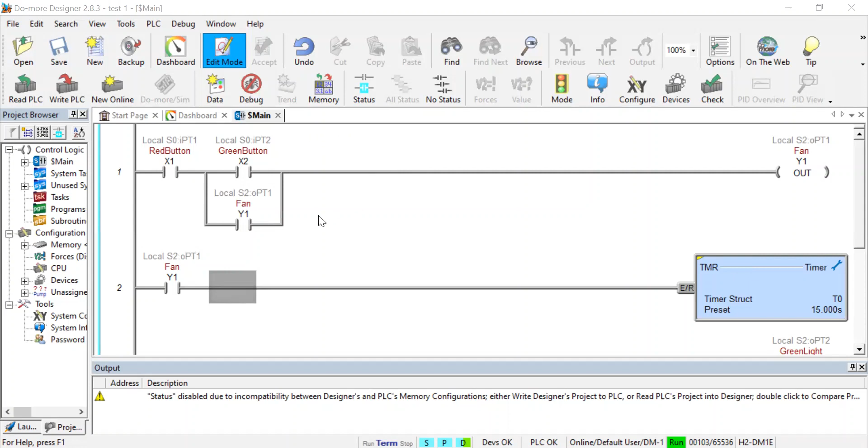And here, this is my ladder diagram I just built. So here's the first rung. We have the red button, which is X1, and the green button, X2.

So here's the fan. This fan address is the output of the PLC, and here it's the same address for the fan. We can see clearly this first rung is the so-called start, stop, and seal-in circuit, because the fan output and this input have the same address, Y1. So usually this is the red button.

This red button is the emergency stop button, as we usually see. And the green button is the start button.

If we press the green button, the current can flow from the left leg to the right and go through here. If we click this button, the current flow can go through this green button and then reach this output. As a result, the output will be energized.

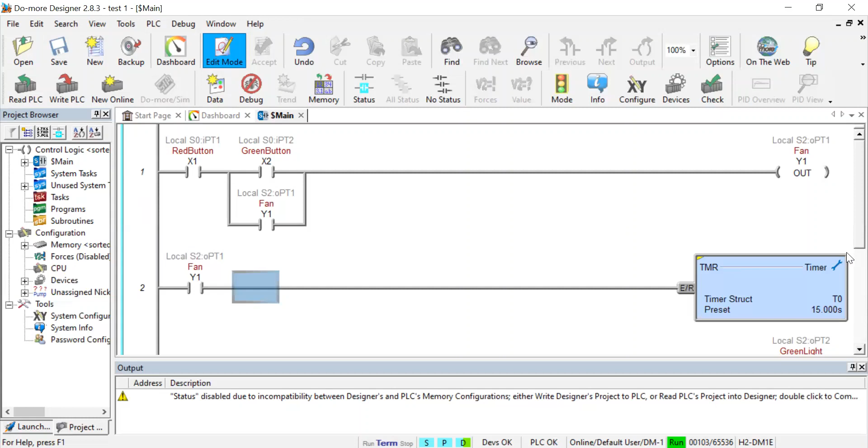So the next rung is the fan. If the fan is turned on, the timer will be triggered. So this is a timer, T0, and you can just specify the name and the preset value. For here, I specified 15 seconds.

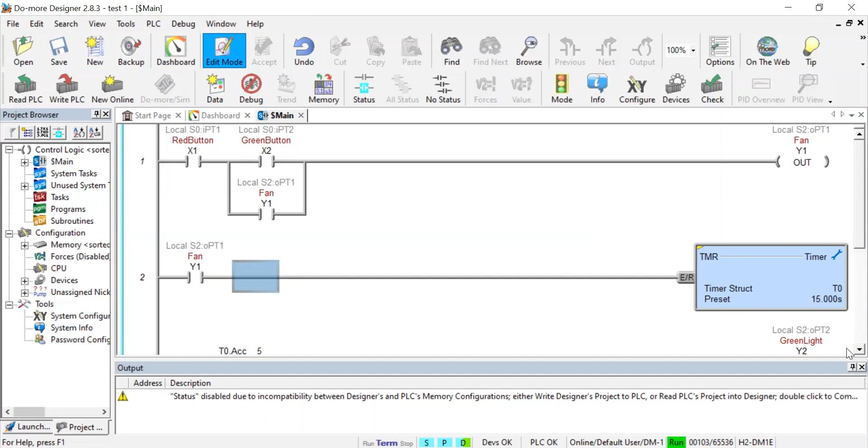I'm going to go through this whole ladder diagram, then I'm going to show you how to edit each of these input and output instructions. So here is T0. If the T0 accumulation value is greater than 5, the green light will be turned on, right? Because the timer starts from 0, so after 5 seconds the green light will be turned on.

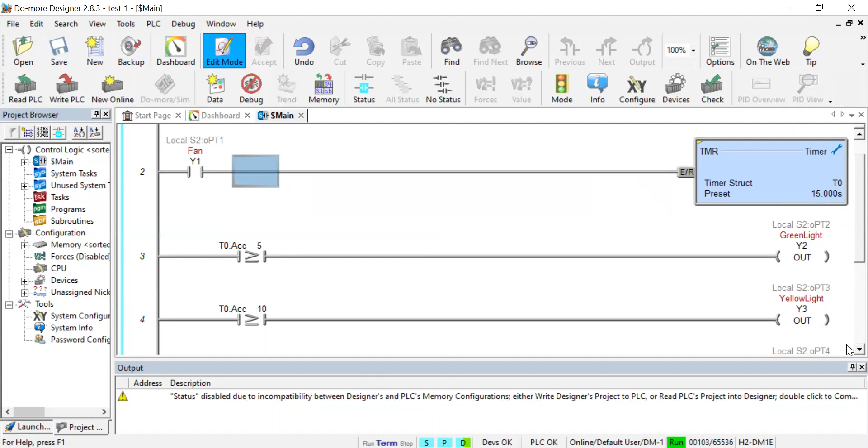So next one is T0.ACC, also the timer's accumulation value. If this value is greater than 10, the yellow light is turned on. Finally, if this is T0, the done bit is turned on. That means if the timer times out, the red light will be turned on.

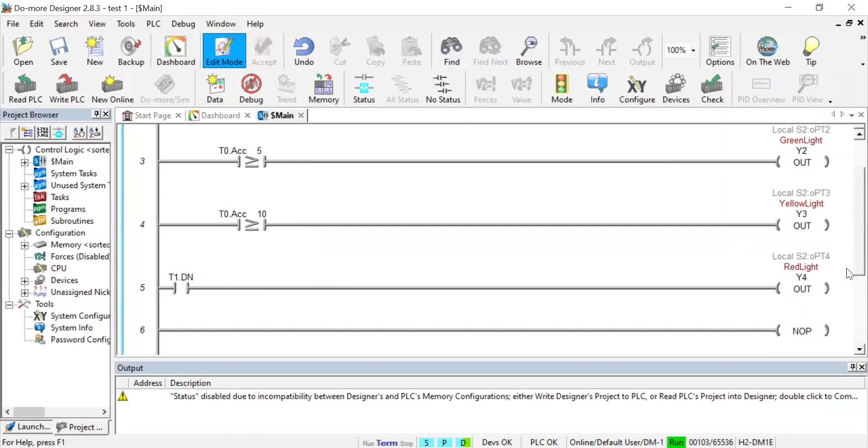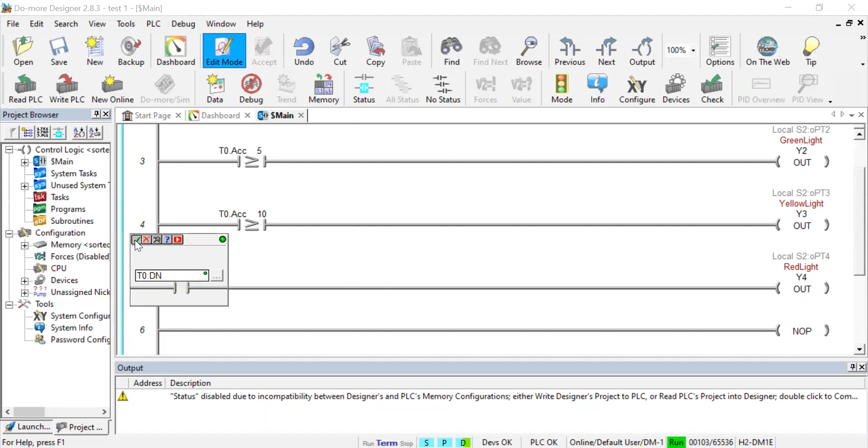So I'm going to show you how to change this. Actually it should be T0, not T1. You can see very clearly, this is Do More, and you can just change the value by typing it in. After you change it, you can click this to confirm, or click the cross to cancel what you've changed.

After you change anything, a yellow vertical bar will appear, which shows that this rung has been changed, and then you can accept it here. After you accept it, it becomes green.

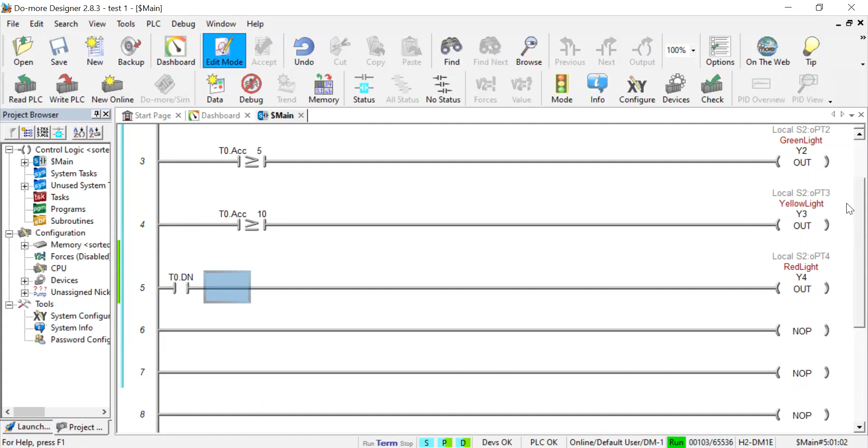So now this is the first ladder diagram using the Do-more Designer to build the ladder diagram for the Do-more PLC. So I'm going to show you here — if you want to edit anything, or build a new ladder diagram, you reach the edit mode. Once you click edit mode, the instruction toolbox will appear here.

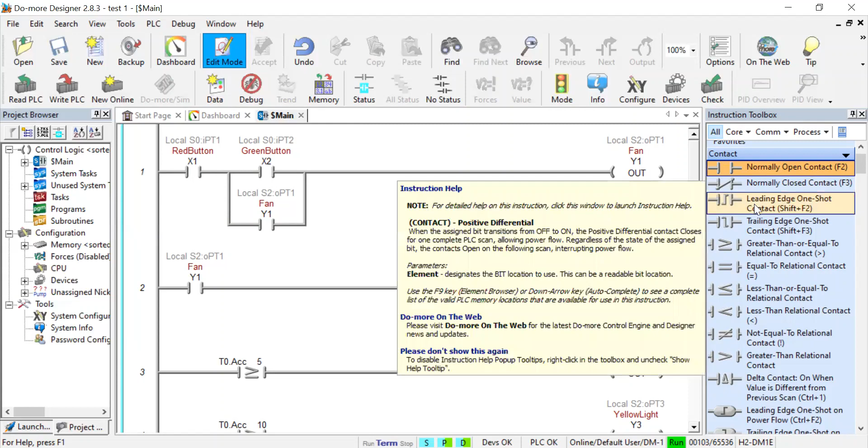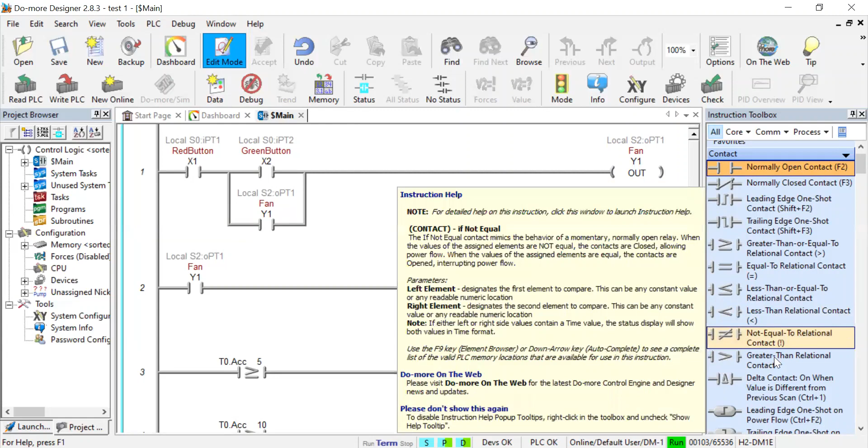So contact — this is contact here. This is normally open, normally closed, leading edge one shot. So greater, equal to, less than, relational contact, not equal to. You can see a lot of other commonly used ones. This is the contact.

So this is a contact, and then look at the coil bit IO. The coil is output, this is for output. They have end coil, the flasher, this is immediate discrete input, and output coil — we use this one, output coil out immediate bit. This is for bit address; it must be specified.

Reset I coil, set, and this is reset, reset bit. So this is the coil, and this is analog, this is device process also here. So this is a CTRIO. Let me show you the timer, because we use the timer and the counter a lot.

Hardware device, high speed math. You can do the math here also. Miscellaneous and data manipulation.

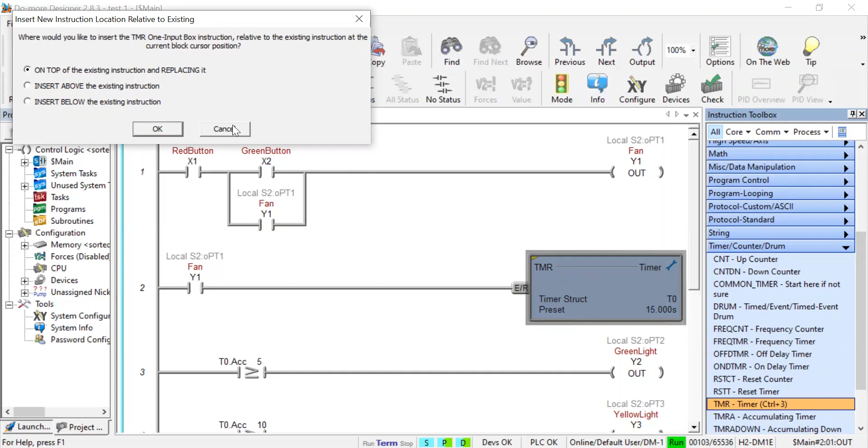So here is how to add the timer. You just drag the instruction from here to the place where you want to put it in the ladder diagram. And then I'm going to show you how to add it.

This is the branches here, edit. So this is where, if you want to insert a rung, you can just go to edit, insert, and here is rung, below the cursor or after the cursor. Here, this is the coil.

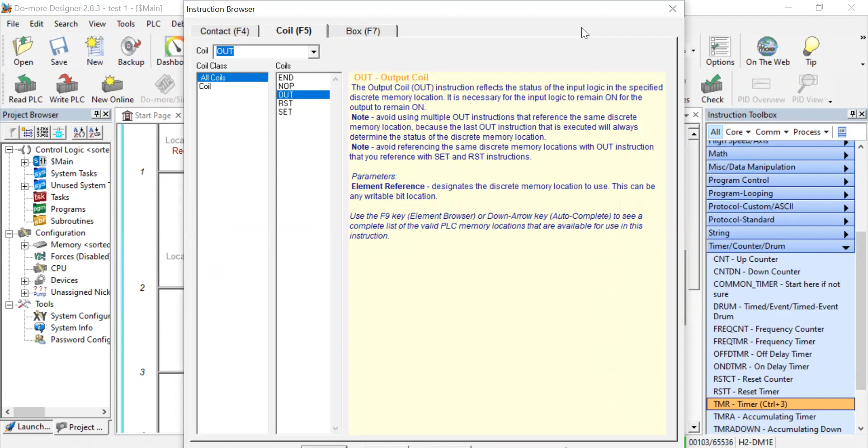You can click this one. So you can just have, excuse me, instructions here. So this is edit. Okay, the wire.

Okay, you can build the wire here. So you can see, suppose I want another timer. Say I want to build a parallel branch here. So what should I do?

So first I go here. Okay, I click this one, and then I go to edit, and wire, because going down, I want to have another branch. Oh no, just one second. Let me put it here.

So you can easily change the name. So this is a very, very beautiful property of it. Let me put it here. Okay, so here, I'm going to show you how to build the branch.

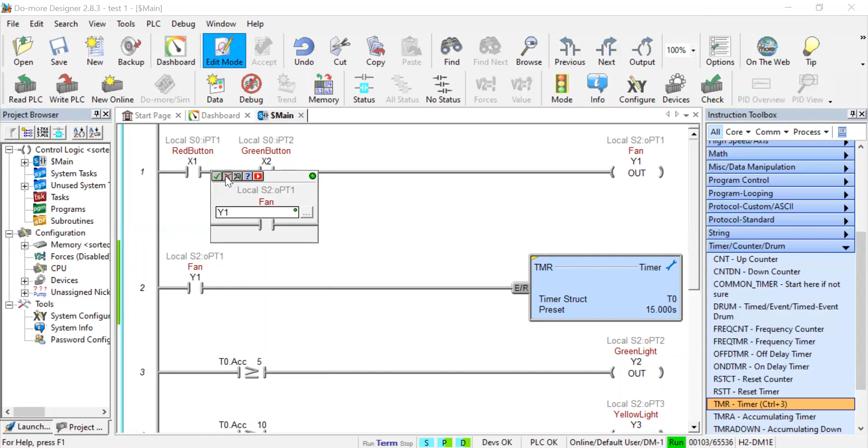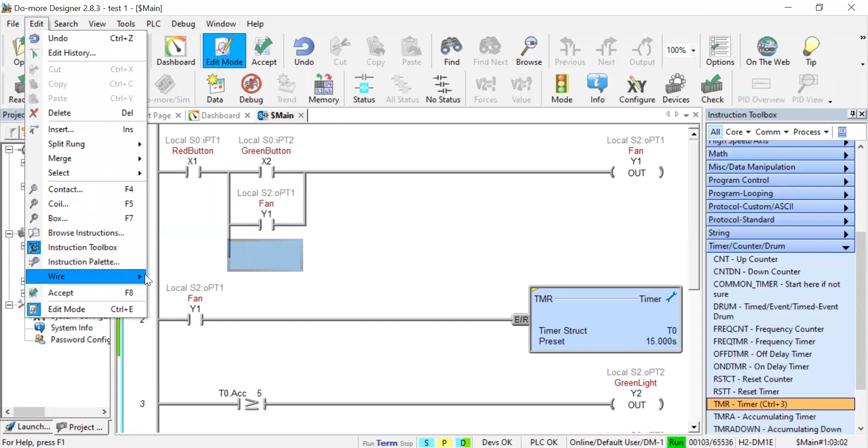Go to edit, wire, going down. See, going down, right? And then I'm going down, and then right. Going right. And then I can put another instruction here.

And let me put an instruction, and I'm just going to show you guys how to add a contact instruction. I just go normally open, just drag it here. So here you need to specify the address. I can just specify, let's see, suppose this one is X, so X1, X2, and let me see X4, just to give you an example, X4.

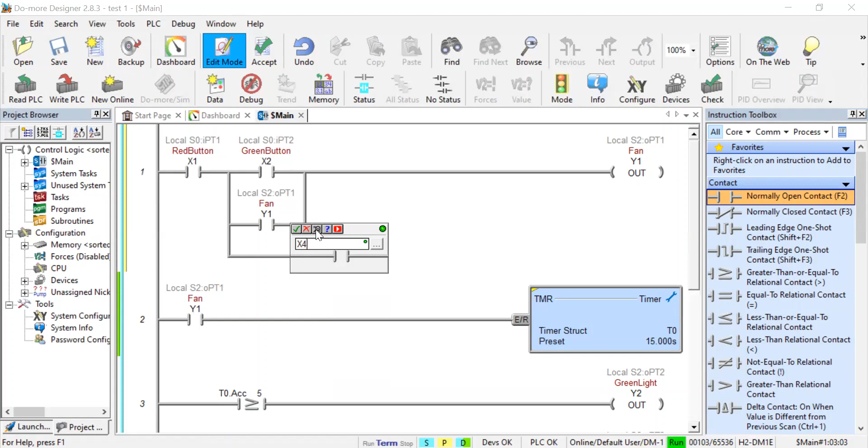And then I can just write something, description. Okay, so write some description. I can just write, say, so if some conditions is met, let's see, you can write whatever you want to see. You write here, then you click select.

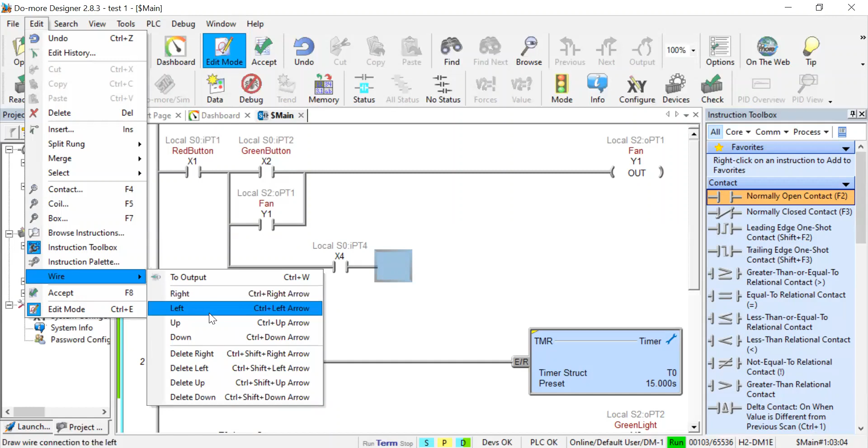Then you can accept it, and then, so you have not finished yet, and this is where now it's going up. See, going up here, and then I need to go left to make sure I have closed. No, so I have finished the ending.

This is a new branch, and then I just accept it. After you accept this newly added branch, it will be optimized. So you can see 1, 2, 3. I have 3 branches, 3 parallel branches for this part.

Now this is so after you finish everything, this one is temporarily on your computer, on your desktop or laptop, so you need to download it onto the PLC. You can use this one, right? So write PLC.

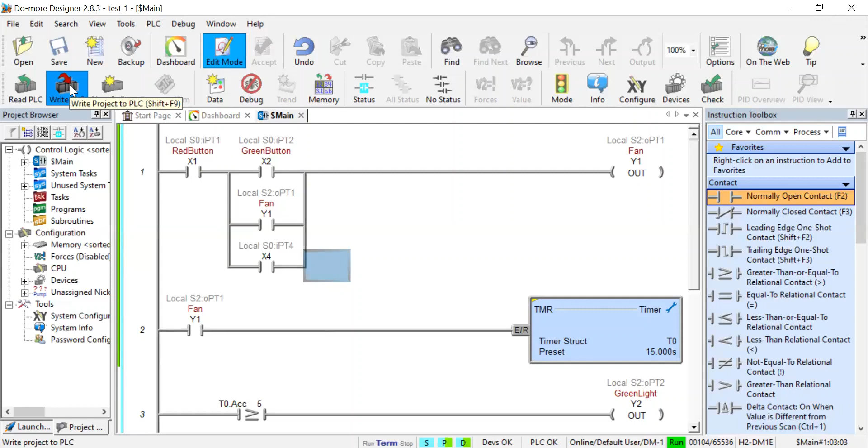Switch to program mode, then download project. So you can click OK. Now it's sending. The system is sending. So do more.

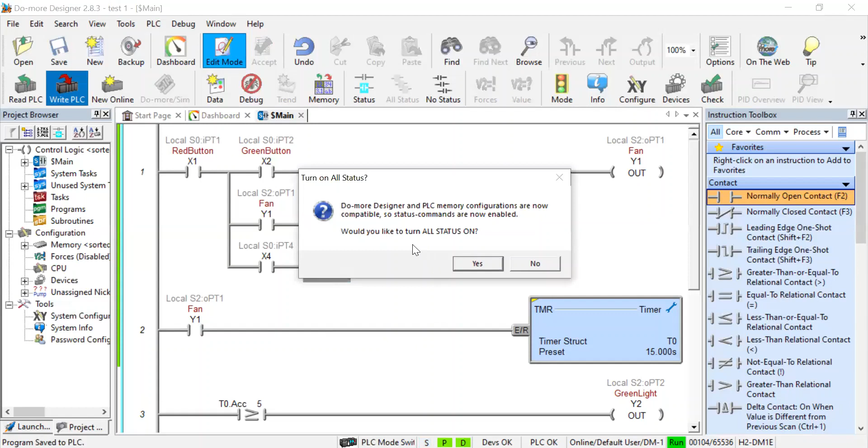Now, so I just send this one to the PLC, and you can see the status. Right? So this is the status. Now this is my first.

Also, so this is my first example of how to use the Do More Designer to build the ladder diagram for the Do-more PLC. Do More PLC is very user friendly, and editing the ladder diagram is relatively easy.

And I hope you enjoy building this ladder diagram for Do More PLCs. So all the following videos will be provided soon. So remember, after you finish every ladder diagram, please save it, to make sure your time and energy are not wasted.

Okay, so save it, and that is for our first lesson about ladder diagram building and using Do More Designer for Do More PLCs. So I hope you have a wonderful day.